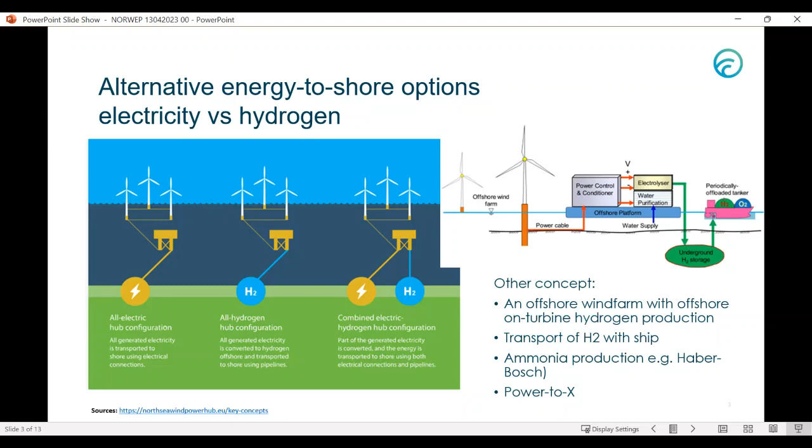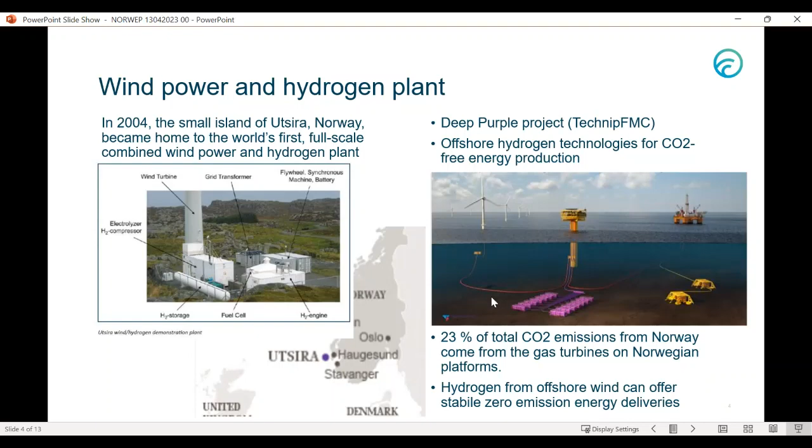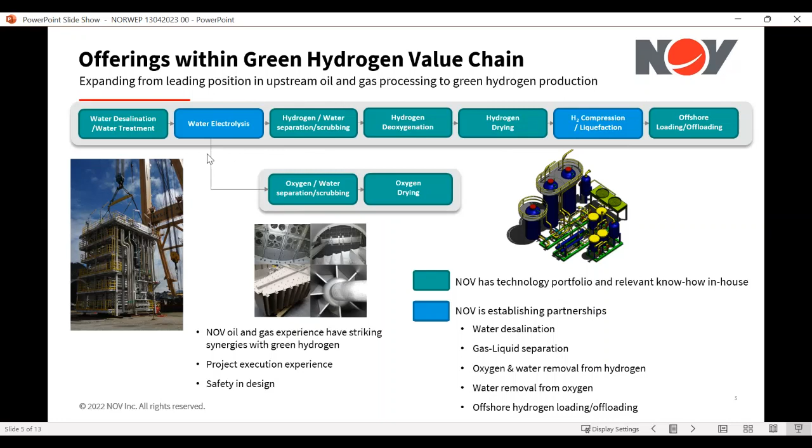The electrolyzer requires a large amount of purified water, and offshore this is based on desalination of seawater. Oxygen is a byproduct which could be utilized and transported to shore. Intermediate storage of hydrogen could be another requirement.

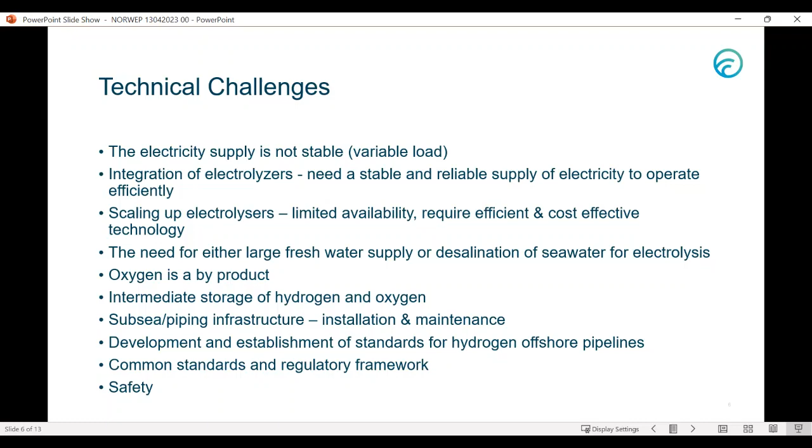Subsea and piping infrastructure are demanding, both during installation and maintenance. Development and establishment of standards for hydrogen offshore pipelines is missing, and in general, common standards and regulatory frameworks at all levels are required. We must not forget the safety aspect.

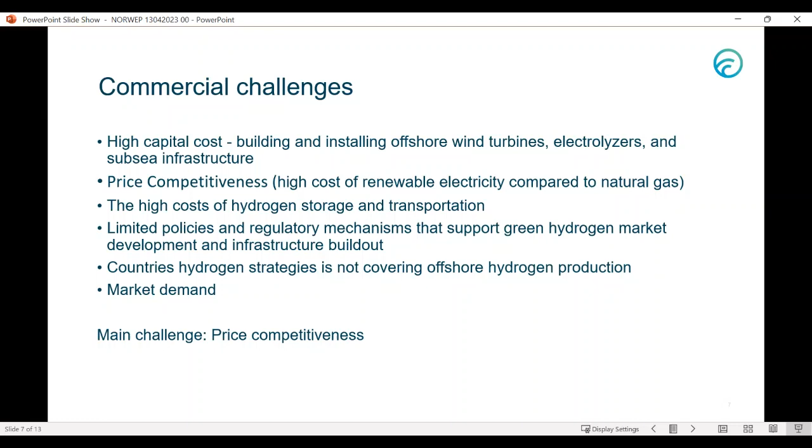We have limited policy and regulatory mechanisms for supporting green hydrogen market development and infrastructure build out. The country's hydrogen strategy does not cover offshore hydrogen production. And we have a market demand issue - the demand for hydrogen is uncertain and it takes time to build the market. So timing is therefore important.

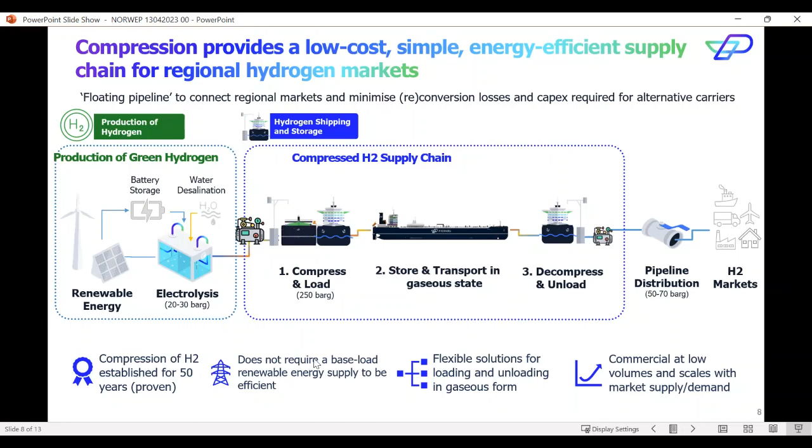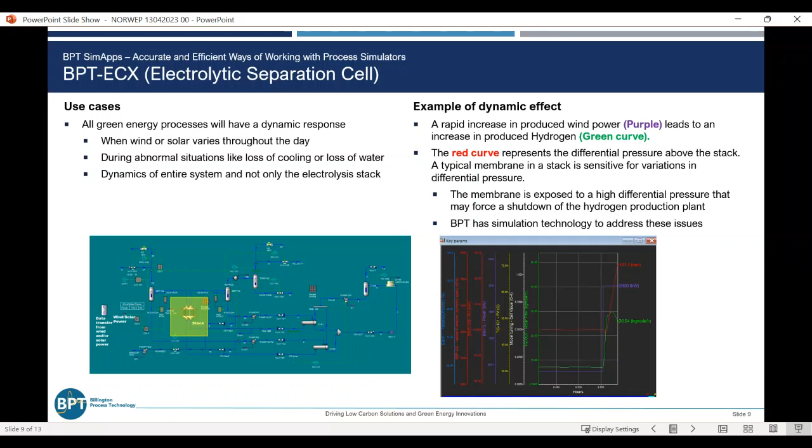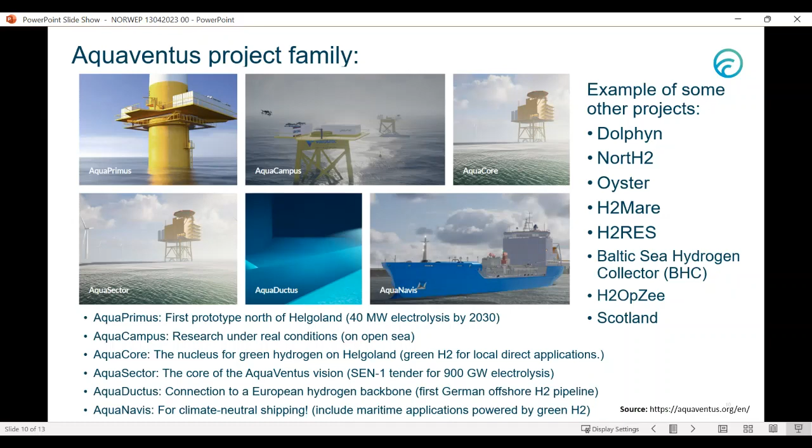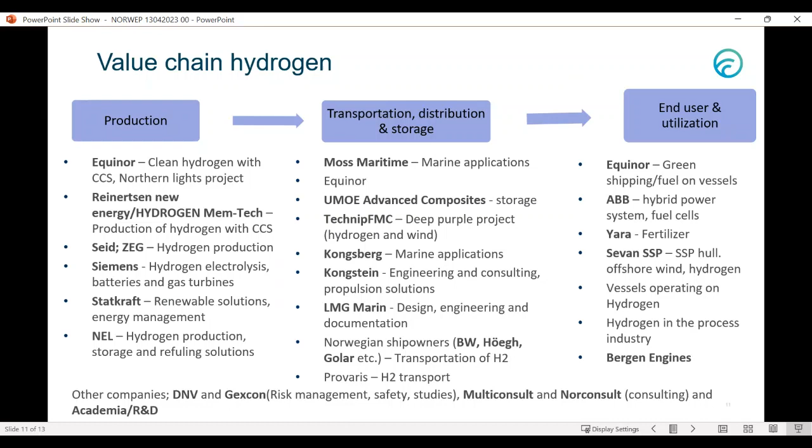At the end, I would like to introduce you to our database of technology and solutions. Here you will find world-class innovative Norwegian technologies. You can search for companies, technologies, competence, equipment, and you will find matches from more than 1,000 unique value propositions. Okay, that's all. Thank you.

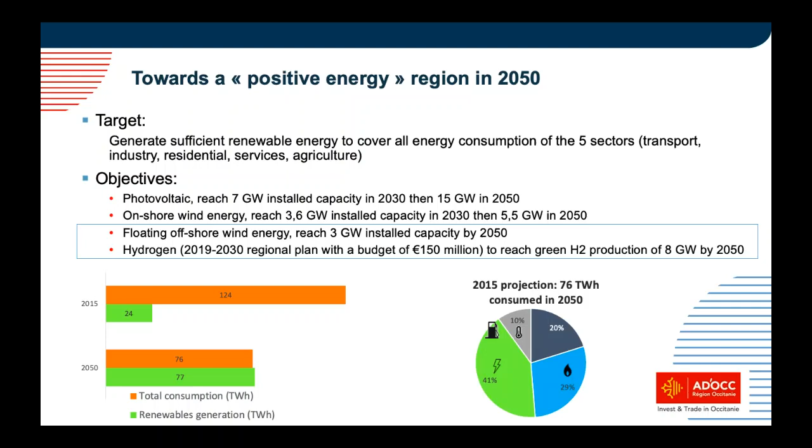Regarding hydrogen, the strategy is to develop the uses that will then foster the production. The regional government is proactive in businesses where they have the possibility to change the rules. They decided, for example, to invest in H2 powered trains and retrofitted coaches to support H2 truck purchase while developing the distribution infrastructure. This is the Corridor H2 Occitanie project. They also plan to replace dredge boats with hybrid ones, because the region owns 3 commercial ports.

All those projects will be operational over the next 2 years. The dredge boat will be ready by the end of the year, the hydrogen trains will be in operation next year, and for the corridor infrastructure, the suppliers were already awarded, and we are now working on the development of production plants.

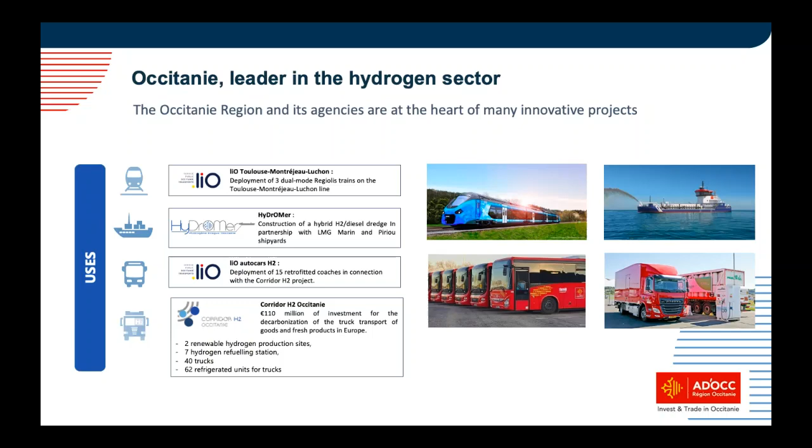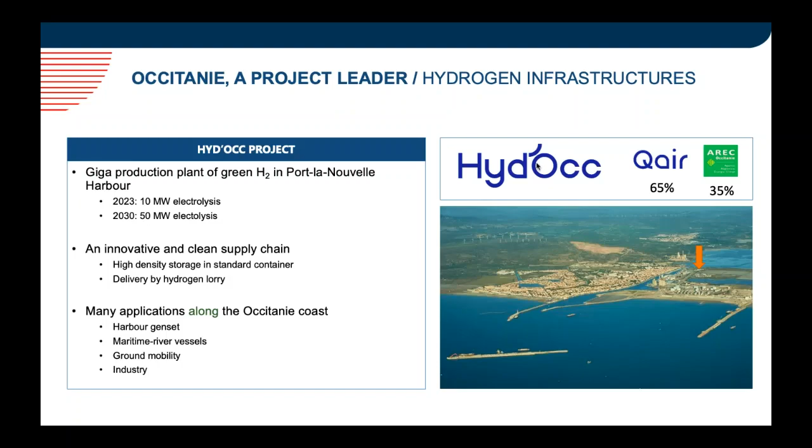Thank you for letting me present Aibel and what we do in offshore wind and hydrogen. My name is Ottar Kristiansen, and I'm heading the hydrogen development and projects in Aibel. I'll cover what we are doing in offshore wind and our track record, and what we've done over the last few years developing the hydrogen business and the projects we've been involved in, both onshore and offshore.

Based on our background from oil and gas and offshore wind, we have taken a stake in the hydrogen market, developing small to large hydrogen plants onshore as well as offshore.

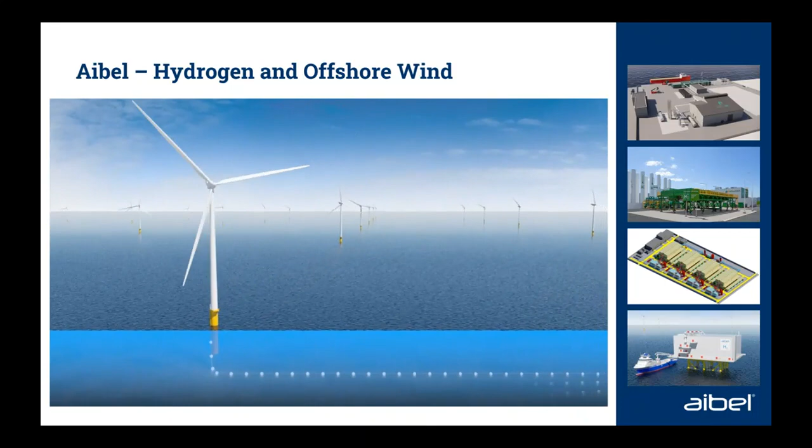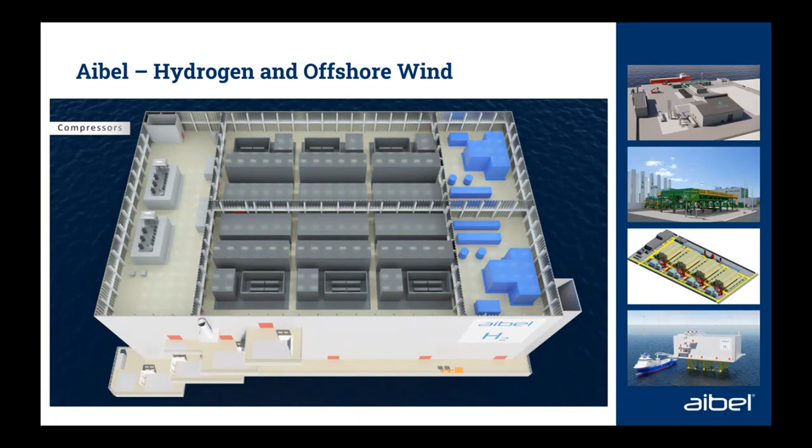Using our knowledge and experience in offshore wind, we decided to develop an offshore hydrogen capability and concept, taking the wind turbine power, transforming it on an offshore platform, then using seawater and electrolyzer technology and compressors to take the hydrogen produced offshore and transport it onshore in pipelines for storage and offtake to one or more offtakers, depending on the client needs.

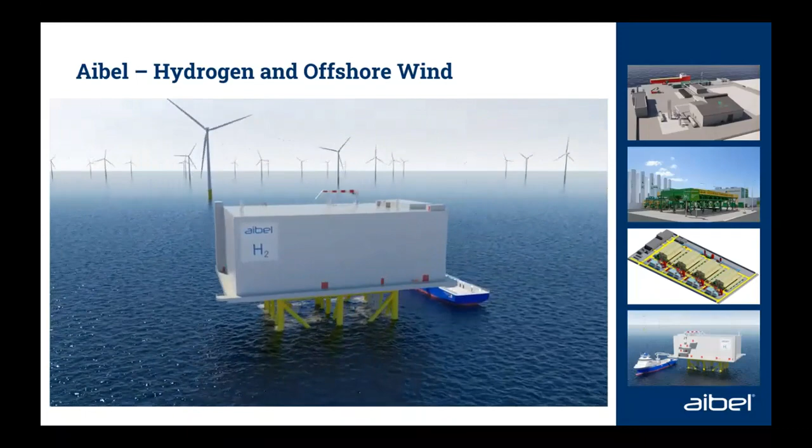I'll get back to some of the details on this technology and what we've done later in my presentation.

A little bit about Aibel and our role in the energy market: we build and maintain critical infrastructure in the energy industry. We have a long history within oil and gas, and we've taken a strong position in offshore wind, as well as now entering new markets as part of the energy transition.

We are a turnkey EPC supplier for both onshore and offshore energy projects. We see more and more clients asking us to also do the installation and commissioning. As part of most new projects we're running, we're doing the installation and commissioning, supporting the client in getting the system up and running during the startup phase.

We have a strong muscle internally when it comes to running large process plant projects, large engineering capabilities in-house, 2,200 people globally. In addition, we have internal yards, meaning engineers and projects work closely with construction and yard facilities to optimize the process to efficiently design, build, and deliver these large projects. The yard capacity totals 30,000 tons of steel per year.

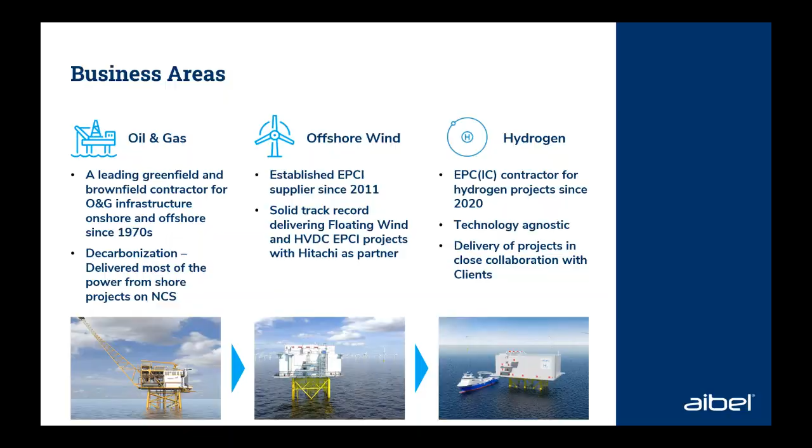A little more on the offshore wind projects and services. We are an early mover. We took an early decision to enter this market based on the knowledge that we have. We are a leading supplier of HVDC infrastructure solutions.

Today we have a backlog of 15 billion Norwegian kroner to deliver HVDC platforms. We have Dogger Bank A, B, and C for SSE. Dogger Bank A was just completed at the Haugesund yard here in Norway and is in transit to be installed on the field. B is on the way to Haugesund to be outfitted, and Dogger Bank C will come later on. With Ørsted, we have Hornsea A and B for the UK sector, and we have the DolWin 5 coming to Haugesund for outfitting this year for TenneT. So a strong position within the HVDC market.

We also entered floating wind early on. We were pioneers working with Masdar and Equinor, developing the Hywind Scotland floating wind farm in 2017, as well as working on future concepts. We are now looking heavily into floating HVDC and HVAC.

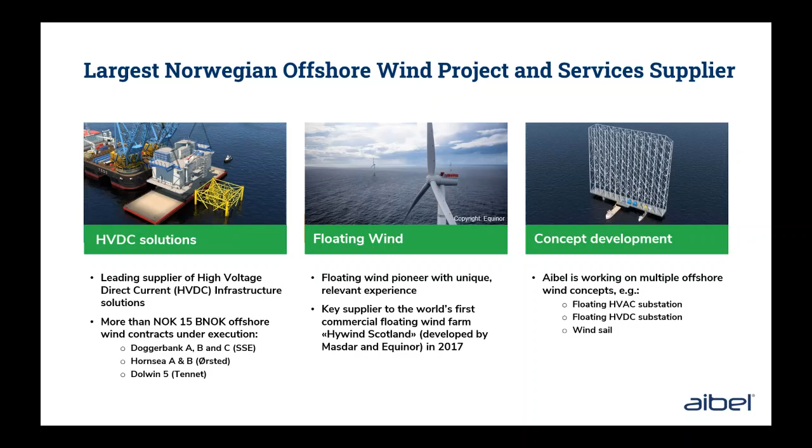As I said, we decided based on the knowledge from oil and gas and HVDC to enter the hydrogen business. We saw a lot of the knowledge and expertise could be used in this market, developing everything from small hydrogen plants to large hydrogen plants, the gigawatt type of plants, requiring a lot of engineering process capabilities, as well as the construction and capability of actually delivering these type of projects.

On the onshore side, we've been looking at everything from a 20 megawatt plant up to 1 gigawatt, delivering hydrogen to steel, ammonia, e-fuel, entering hydrogen into the grid, as well as different transportation sectors, mainly the maritime sector in our case.

We, together with Nel, delivered the 20 megawatt hydrogen plant for Iberdrola for fertilizer production. Aibel had the role of engineering and procurement services for Nel, delivering that plant. That's up and running in Spain as we speak. It was delivered last year.

On the hydrogen production plants, there's a high focus on technical safety as well as regulatory requirements. We have all the capabilities to take the role of and responsibility for the balance of plant, doing system engineering and process design, and delivering control systems, storage, and buffering systems. We work closely with clients to optimize choosing the right technology and optimize the design for CapEx, and not least, also the OpEx of such systems.

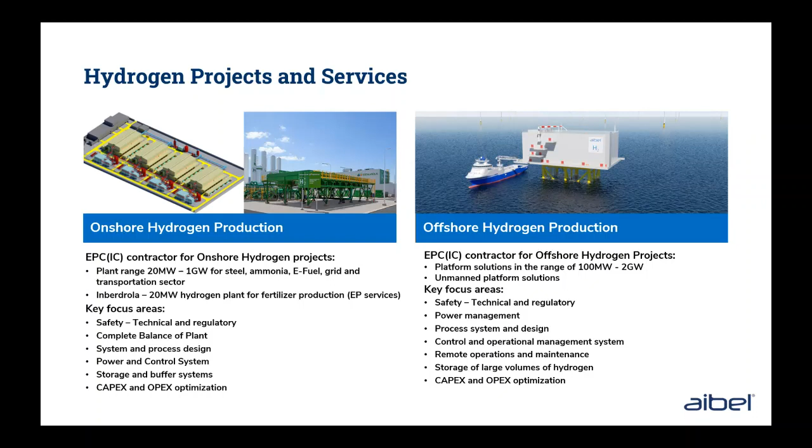Good morning, everyone. It's a pleasure to be with you this morning. My name is Olivier and I'm part of the business development team in Lhyfe. My aim this morning is to give you a few words about Lhyfe, the company, who we are, where we stand, and where we are going in our industry of green hydrogen.

First, Lhyfe, who we are. We are a French company. We were settled in 2019, so quite a young company, with a scope of work which is to be an independent green hydrogen producer.

Our headquarters is in Nantes, in the west of France, and we are having strong growth in the past months and years, meaning that, for instance, we went to the stock market last year and got from it 118 million euros to support our development in green hydrogen.

Our roadmap is quite clear: we are heading to have in operation 55 megawatts of electrolyzers in 2024, 200 megawatts in 2026, and we expect to operate 3 gigawatts of electrolysis in 2030. This development will be balanced across onshore and offshore production, and we expect offshore production could also represent 3 gigawatts in addition to those former 3 gigawatts.

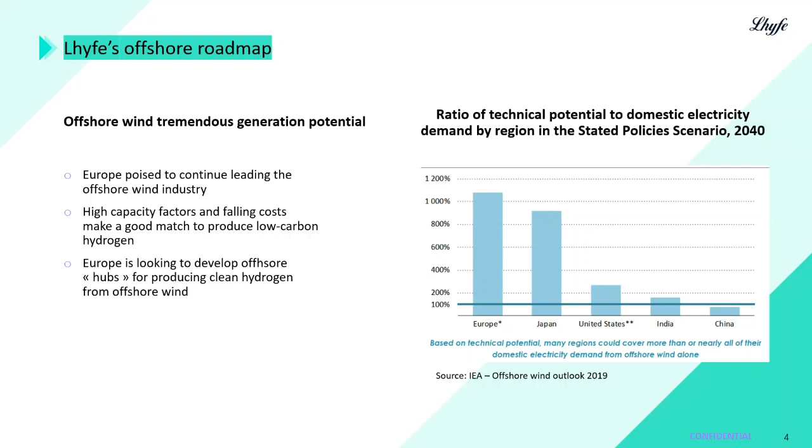This floating ship is currently in Saint-Nazaire Harbor. We are finalizing all the commissioning of the electrolyzer in the harbor, and by the end of spring, this electrolyzer will go to sea, next to Saint-Nazaire or the island of Le Croisic, where you have floating wind turbines, the only one operating in France so far, and will connect this electrolyzer to the wind turbine. This will be the first experience in the world of a floating electrolyzer producing in direct connection with a floating offshore wind turbine.

This electrolyzer will produce 400 kilograms of green hydrogen per day, meaning we are deploying a 1 megawatt electrolyzer on this platform. This next step will allow us to finish our research and development phase, and we are heading to the industrial mode.

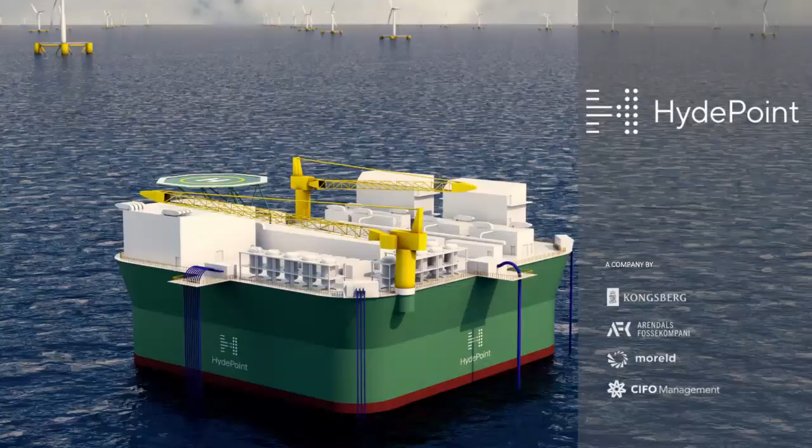What you see on the slide here is HydePoint, an offshore hydrogen solution combining a substation and a hydrogen process plant. This is a rendering of a floater we have designed at the concept level: a 60 by 60 meter hull packed with equipment on several decks, with water processing at the bottom, auxiliary equipment such as instrument air and nitrogen production on the next deck, and power electronics and electrolyzers just beneath the top deck. This will be an unmanned solution that can be operated from shore.

This floater is dimensioned to be connected to a 1 gigawatt wind farm, and it can have a 500 megawatt electrolyzer on board, producing up to 10 tons of hydrogen per hour. We have integrated all the equipment needed for both the substation and the hydrogen process plant on board. The design is modular and can be sized both up and down.

What you see here is a floater. We believe this will be the end game as offshore wind moves to deeper water and floating wind scales up. But this unit can of course also be realized as a bottom-fixed version.

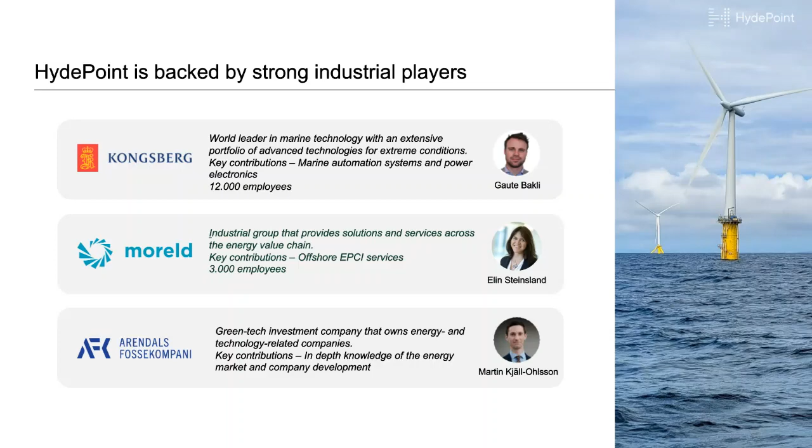So what we will do in HydePoint is really to help optimize the value of offshore wind farms by combining hydrogen production and energy transmission in a cost-efficient manner. As you all know, intermittence is already a challenge, and with the increasing amount of renewable energy expected in the future energy mix, the need for flexible storage solutions will be very important. HydePoint can be integrated with the grid and store energy as hydrogen, making sure all the energy from the wind farm can be used.

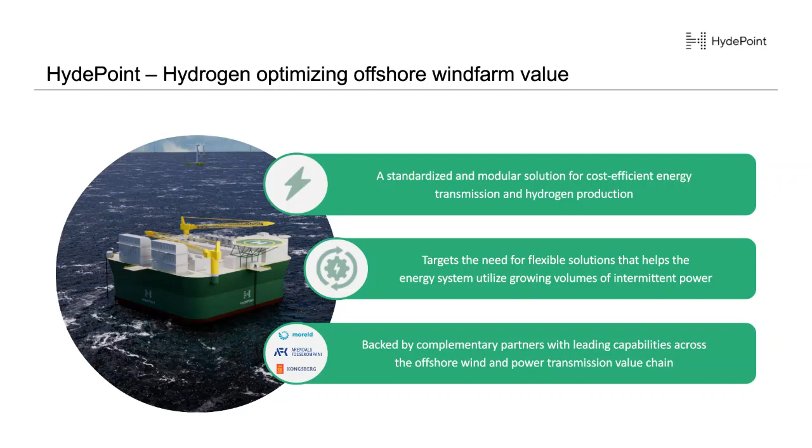Also, there is a growing need for hydrogen in the industry. Today, about 90 million tons of grey hydrogen is produced, and this needs to be replaced by green hydrogen. New segments for hydrogen use will come too, such as hydrogen in steel production.

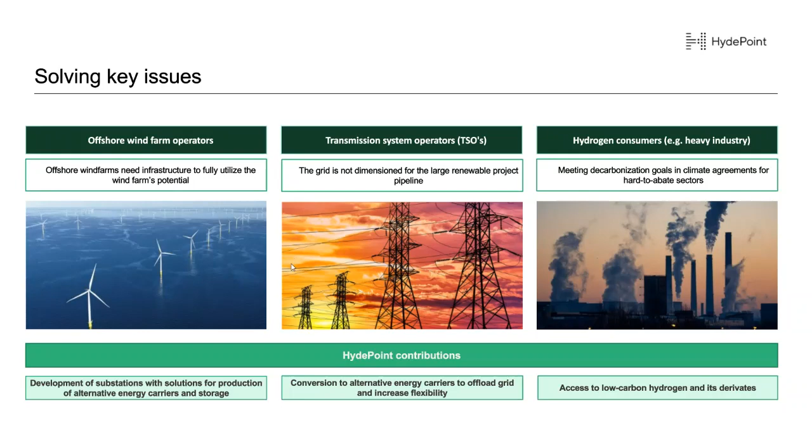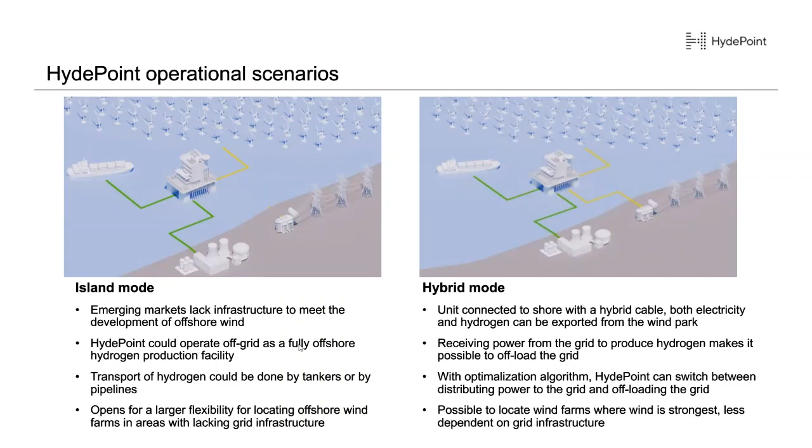The large floater I showed you on the first slide will be highly relevant when floating wind is scaling up. Bottom fixed is built at large scale now, and this is also where we expect the first HydePoint installations will come. To industrialize the HydePoint concept, we have to put together a pilot program.

We are also planning a 10 megawatt quayside version, and it may also end up larger than 10 megawatts. This pilot will be realized as a JIP, where we are inviting wind developers to join us in qualifying offshore hydrogen solutions. This is important because when you want to put a hydrogen process plant offshore, you need to think in a different way than you do onshore.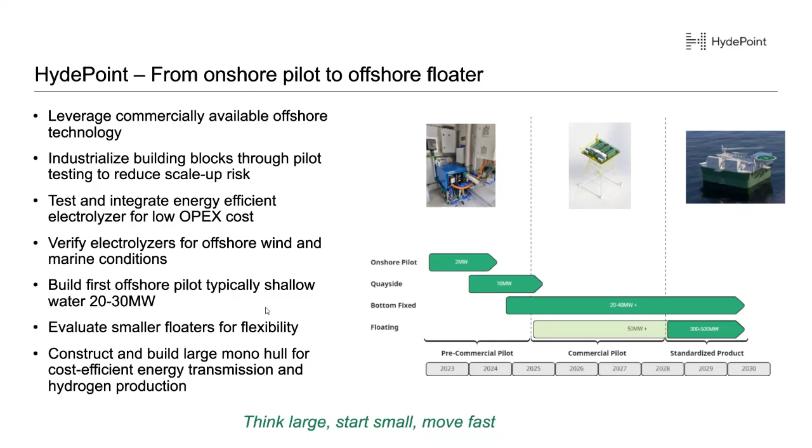For example, there is a need to think vertically compared to horizontally to keep the footprint as low as possible, since this relates directly to cost. So again, this is how we plan to develop from the first pilots we are currently working on. We are also planning the quayside pilots, and we are having discussions now with Equinor to use their facilities at Kårstø for this pilot, and then we will gradually scale this up according to the market needs.

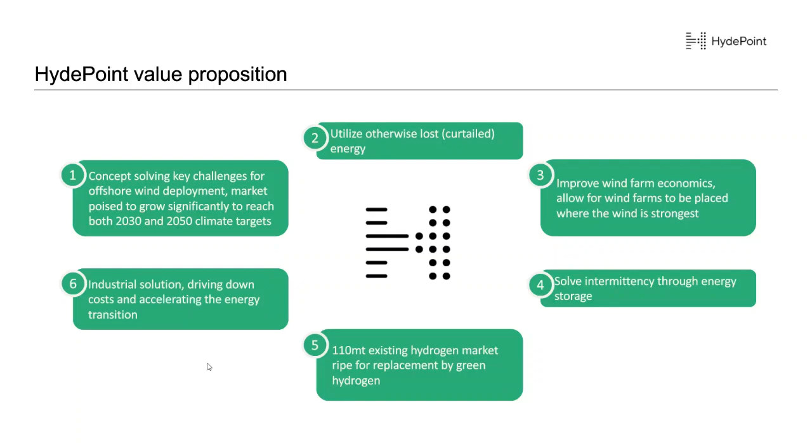To sum up, a HydePoint is a combined substation and hydrogen process plant for offshore use. It will help utilize all the available energy from offshore wind. It will allow energy storage, and it can supply large volumes of hydrogen that will be needed in the future. Thank you very much.

Thank you very much, Elin, for your presentation. There was one question in the chat, but Eirik Melaaen from Norway was kind enough to answer it. The question was about expectations or requirements for offshore hydrogen production related to the Norwegian offshore wind tenders, Utsira Nord and Sørlige Nordsjø II. It seems there's no actual expectation or requirement. The requirements are more connected to maybe the link to offshore oil and gas production.